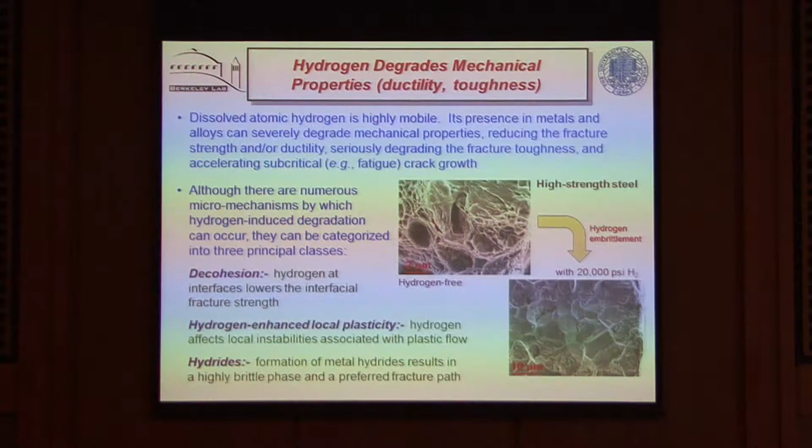And of course, in certain materials, hydrogen can form hydrides, and these are a particularly brittle phase, which can then fracture. This is a problem in things like zirconium, titanium, and so forth. And this is also a mechanism by which hydrogen can accelerate cracking. So the presence of hydrogen can lead to lower fracture stresses, lower fracture toughnesses, but vastly increased subcritical cracking, leading to shortened lifetimes.

And so taking a leaf from the aerospace book, we're going to need to know how hydrogen affects the velocity of cracks. We're going to need to have that information so we can then make safe and reliable predictions about how long components will last in the presence of hydrogen. And this is an absolutely critical aspect of the hydrogen economy, that we can do this. And the parallel, of course, is in the aerospace industry, where this has been done very effectively. Not necessarily for hydrogen, but for...

So how do we do this? How do we actually generate this kind of information? Well, again, it's a marriage of science and engineering. There's a need to understand mechanisms. There's a need to understand how hydrogen can get to boundaries, how it may lower decohesion, or how it may affect the local instabilities associated with plasticity, and how it may be synergistic with other events that are taking place. In steels, of course, we know there's a segregation of impurity elements to boundaries.

There is clearly a synergism between this type of phenomenon and the phenomenon associated with hydrogen. There's a need to use mechanics. We can understand these mechanisms and then embed them in crack-tip fields and make predictions, which is a form of fracture mechanics, when failure can take place. So there is both the science and the fracture mechanics, and the integration of those, which are very important for the understanding of this problem.

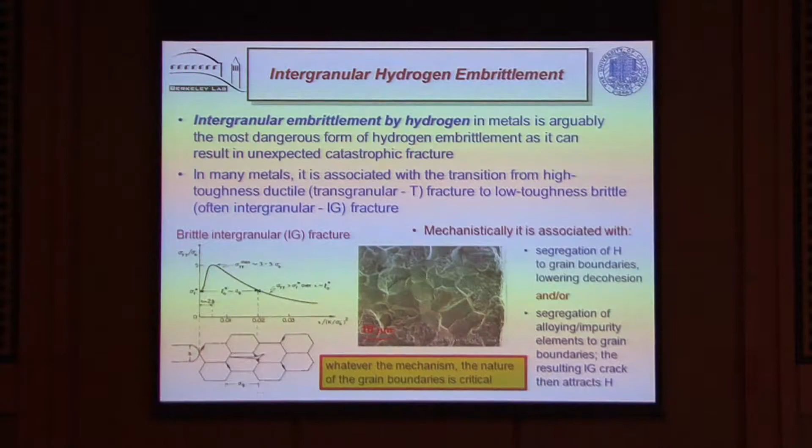This is K. It's a function of the stress times the square root of the crack length, with some geometry factor in there as well. And this defines the intensity of the stresses and displacements ahead of that crack tip, and as such can then be used to correlate to the onset of fracture. We can correlate the value of this stress intensity to when fracture can take place, and we can also correlate this term to the velocity of cracks. So it's a quantitative means of examining from a continuum perspective when and how fracture takes place.

Now, in its simplest form, we talk about a critical value of K, which is known as the fracture toughness. That's when the component breaks in two. It's the catastrophic failure point. But that's simply the end point. If one wants to know how long a component may last, a hydrogen tank, a pressure vessel, piping, one needs to know how long it takes any pre-existing crack, which inevitably will be there, to grow until you exceed this fracture toughness. And that's what subcritical crack growth is, and that's the essence of the prediction of life in most engineering components. And so when K values are less than the critical K, cracking can occur subcritically.

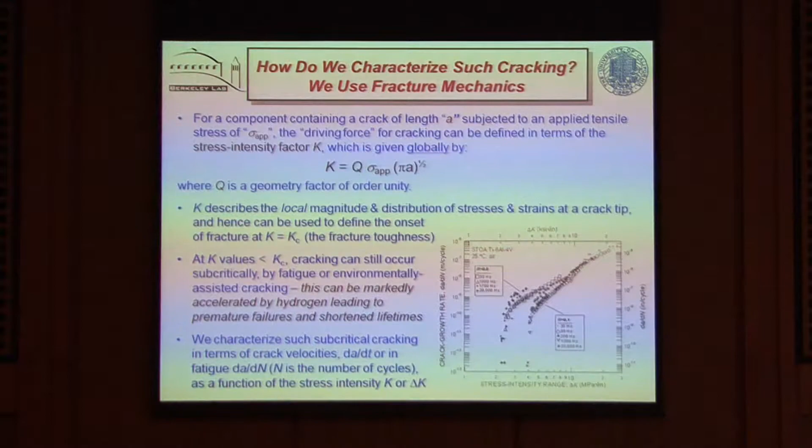Now, one of the unique aspects of Kyushu University now is these sorts of plots are being generated for the latest generation of materials that will contain hydrogen, and, in one very important aspect, at very high pressure hydrogen. If we're going to use a hydrogen economy, we're going to have compressed hydrogen. There is very little data on the velocity of cracks in steels or other materials in high pressure hydrogen environments. My colleague Brian Somerday will talk about this this afternoon, because he has one of the few facilities in the United States to do high pressure hydrogen. There are such facilities here in Kyushu University. So this is a very, very important aspect of the work that will be done here.

So my take-home message today is that there is a need to understand how hydrogen affects the properties of materials, and one critical aspect of this is how it affects subcritical cracking. We need to generate data in terms of the velocity of the crack as a function of the stress intensity. We need to look at this under sustained loading and under fatigue crack growth loading, and we need to be able to cope with how you integrate these things together.

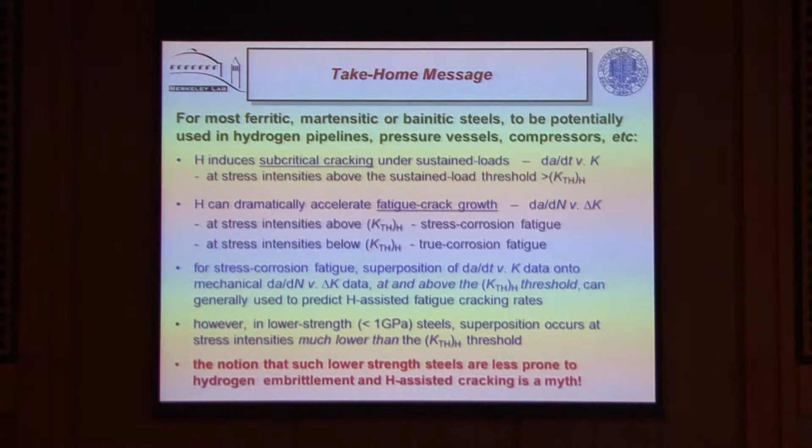And one other thing I might mention here is that some of the ways that this has been done tend to suggest that high-strength steels can be very, very susceptible, and low-strength steels can be far less susceptible to the embrittlement of hydrogen. And I think that is a myth. I think if you look back, you'll see many, many examples where people have used lower-strength steels, and I'm talking about steels less than a gigapascal in strength, thinking that they are relatively immune to hydrogen embrittlement. And in fact, that is not the case. And it's come about because of a lack of understanding of how the experiments are done.

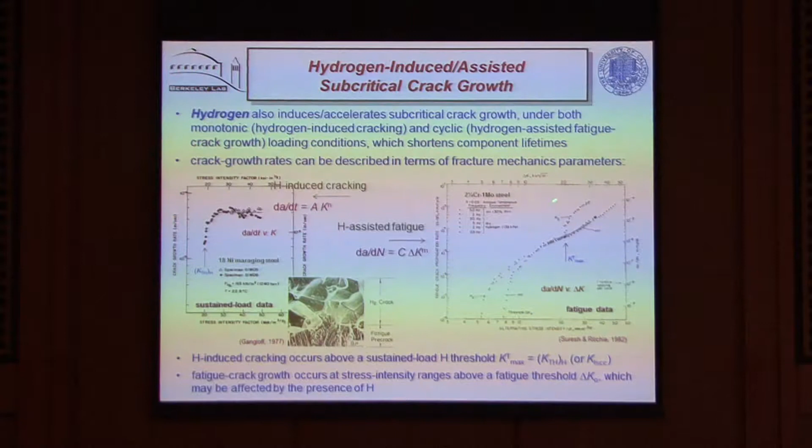And in a high-strength steel, this threshold is the one we measure under sustained loading. And so this has led people to think that there may be a superposition of these types of behavior. This is the sustained loading, this is cyclic loading, and we can simply superpose this data on top of fatigue under a non-hydrogen environment and predict what's happening in fatigue in hydrogen.

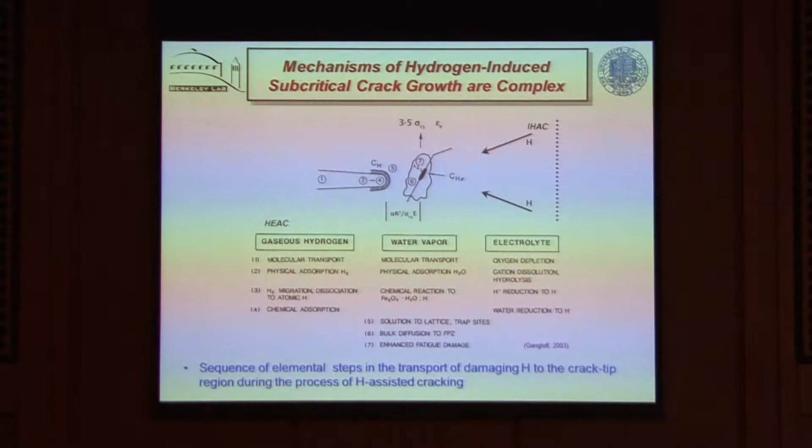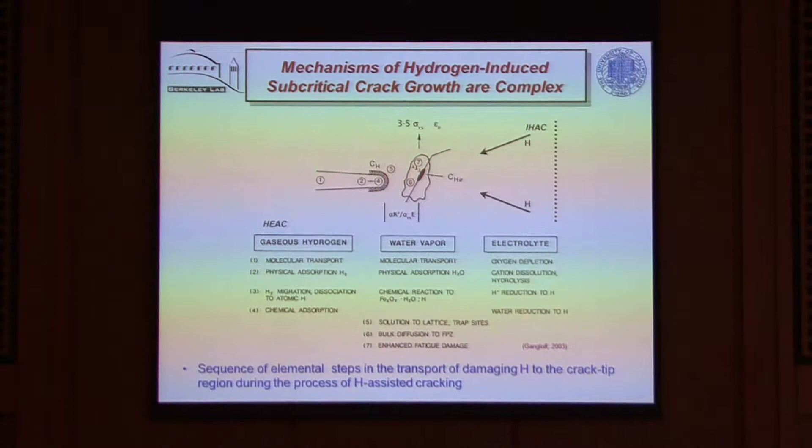Now, mechanistically, there are a whole plethora of mechanisms that are important. There are transport mechanisms of how hydrogen gets to the crack tip. There is oxide at the crack that has to be penetrated. There is the mechanics of how the hydrogen affects the fracture inside the material, be it some decohesion at an interface or a dislocation pile-up against an interface. And it needn't be gaseous hydrogen; we can generate hydrogen in an electrolyte just from the reduction of water, for example. All these mechanisms are extremely complicated, and these mechanisms still need considerable work to be done on the scientific basis.

But in terms of the engineering side, these are embedded into crack tips, and we can see certain patterns. As I said, we talk about what we call true corrosion fatigue, where the effect of hydrogen here is occurring primarily at lower stress intensities. And people talk about stress corrosion fatigue, where we get this sudden superposition, this sudden elevation of the crack growth rates in hydrogen. And of course, in most cases, we have both these phenomena.

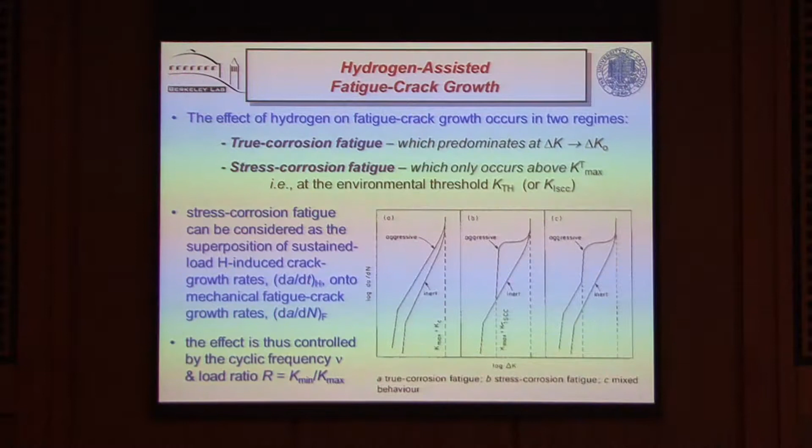Now, how can we take care of this effect here? This is a rather interesting phenomenon which has been known for some time, is that we can generate superposition. This is the rate of growth of a fatigue crack, dA/dN, this is the crack growth rate versus the stress intensity. There we have the effect in air, and then we put it in hydrogen, and we get this sudden acceleration. And this can be basically achieved by superposing this data onto the fatigue data.

But there's things we have to think about here. This is K, and this is delta K. So where this superposition takes place on this axis depends on the relationship between the cyclic and monotonic loads, the so-called R ratio, as it's sometimes called. And in this axis, we have dA/dt, and this is dA/dN. So the superposition in this direction depends on the frequency of loading. And so depending on the relative frequencies and the load ratios here, this superposition can take place at different points in the horizontal and vertical axis, but in a very predictable fashion.

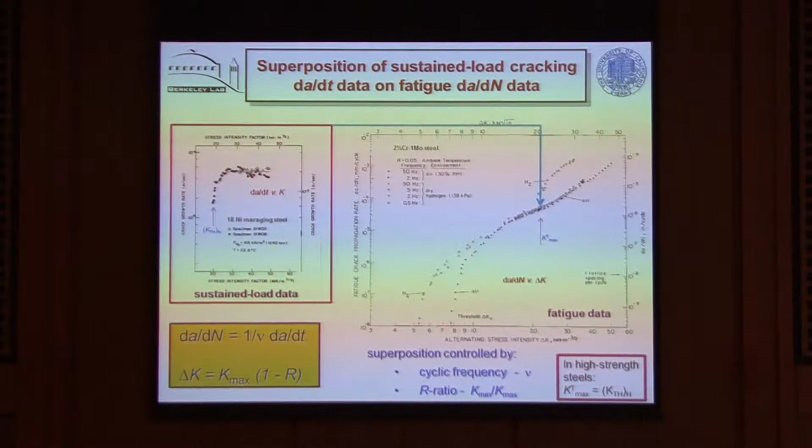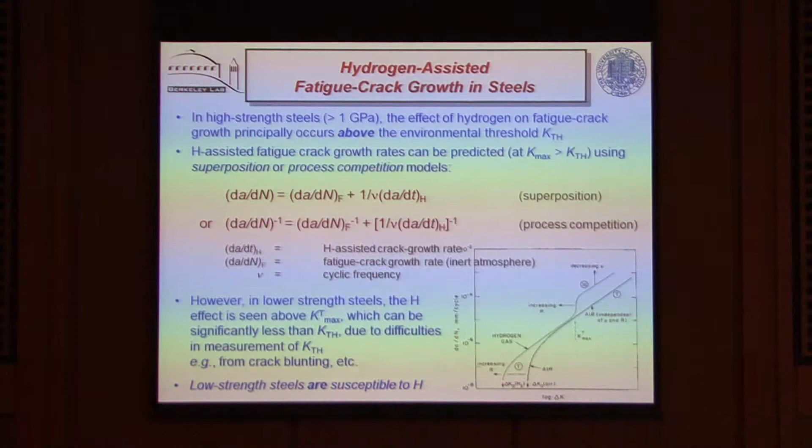So you can do this superposition in two ways. You can superpose the monotonic and the cyclic loading in series, or you can superpose it in parallel, depending on whether your two processes are simultaneous or are competitive. And I won't go into the details of this, but in high-strength steels, this is a very predictable process. This point at which you get this superposition, you can measure under sustained loading as the sustained load threshold. Very nicely cut and dry, and you can generate a good understanding.

And this is what the data looks like. This is data on a martensitic bainitic steel. It's a pressure vessel steel. I haven't talked about this lower effect. I'll talk about this a little bit later. There's another effect here, but you can see the superposition here of data in hydrogen. This is in air. If we have hydrogen sulfide, of course, we get higher fugacities of hydrogen, and this leads to faster crack growth rates.

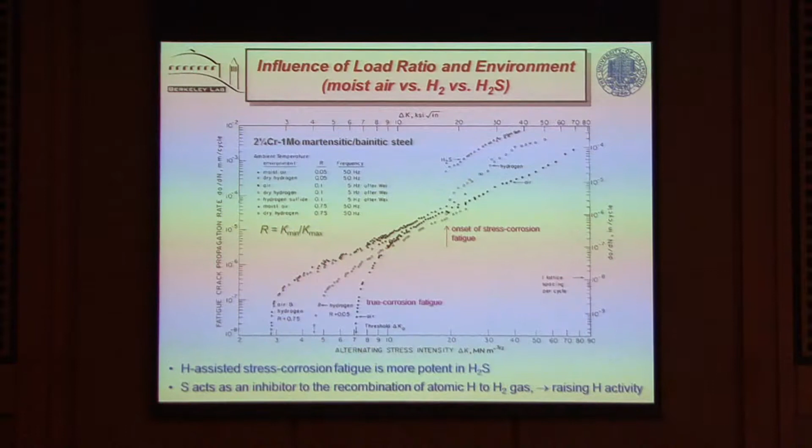This is in pressure. Now, this data was taken some time ago, and here we're dealing with the same superposition. This is basically air. Superposition in low-pressure hydrogen, which would be typically about a tenth of a megapascal. And at the time I looked at this, we had data at 7 megapascals. We got a much higher rate of crack growth in high-pressure hydrogen. 7 megapascals. The facilities here at Kyushu can do tests at 120 megapascals.

Now, there's lots of data in the literature on hydrogen embrittlement and how hydrogen affects crack growth, but there's very, very little data at these very, very high pressures. So from an engineering perspective, information on how cracks grow in high-pressure hydrogen, which reflects the reality of a hydrogen economy, is critical, and that's taking place here. I think probably this is the only place it can take place. There are very few facilities outside of Japan.

Now, there is another effect that's interesting, by the way. If you look at lower delta Ks, you see hydrogen also accelerates crack growth down here. And what's interesting, in these sorts of steels, where the mechanism is primarily decohesion related, the hydrogen-assisted cracking here is intergranular, but down at these lower delta Ks, it's not. It's transgranular still. And in fact, these lower growth rates are very important because they can dominate a life prediction calculation.

Now, the complexity here gets very large, and one of the effects that we deal with down here is not so much that hydrogen accelerates crack growth, but air can decelerate crack growth. In a moist environment, you form oxides at the crack tip. And at these very low growth rates, the so-called crack opening displacement can be fairly small. And these oxides then can wedge the crack. The analogy is if you're talking and I put a donut in your mouth, you're less able to open and close your crack. Doesn't seem very scientific, admittedly, but it's a very potent mechanism which basically reduces the growth of cracks at these low levels.

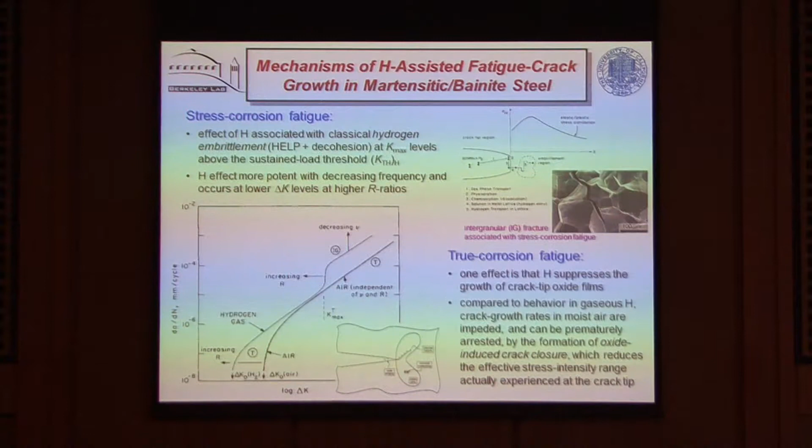Now, there is one final point I want to mention here, is that this approach of superposition has been around some time and works extremely well with high-strength steels. But if we go to a low-strength steel, and low-strength steels are still used in a tremendous amount in engineering because they have higher toughnesses and are less prone to fracture. Below about a gigapascal, if we try this approach, it doesn't work.

In this particular material, this is a lower strength 2¼ chrome moly steel, the stress corrosion, or the sustained loading threshold in hydrogen is at 85 megapascal root meters. It's about here. So many people have thought, okay, these steels are relatively immune to hydrogen embrittlement. If I have stress intensities below this level up here, I haven't got to worry.

But if you do those experiments in fatigue, and most structures see cyclic loading, lo and behold, you get this same effect, this sudden acceleration, but at much lower levels than the stress corrosion, than the sustained load cracking. If you did the test under non-cyclic conditions, you'd have to have a K up here before you see hydrogen embrittlement, but under cyclic loading, it occurs at much lower levels.

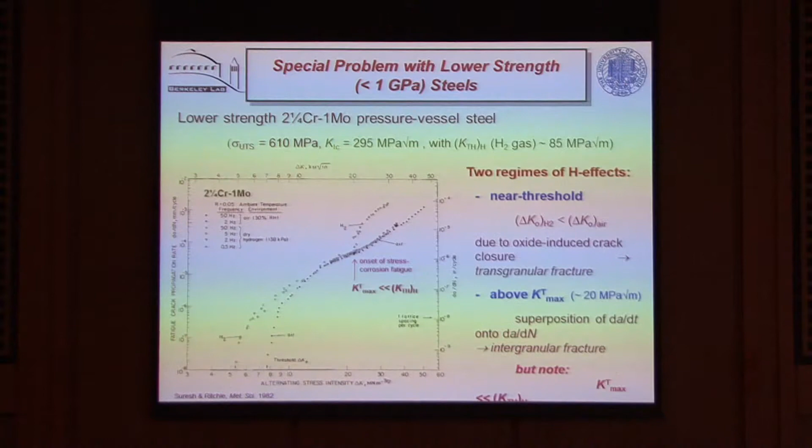And the point is that this is the same sort of stress intensities you see in high-strength steels. So low-strength steels are as susceptible to hydrogen embrittlement under cyclic loading. But you wouldn't realize that if you were looking at non-cyclic conditions. Now, why is that? And the reason is that in these lower-strength steels, the crack tends to blunt.

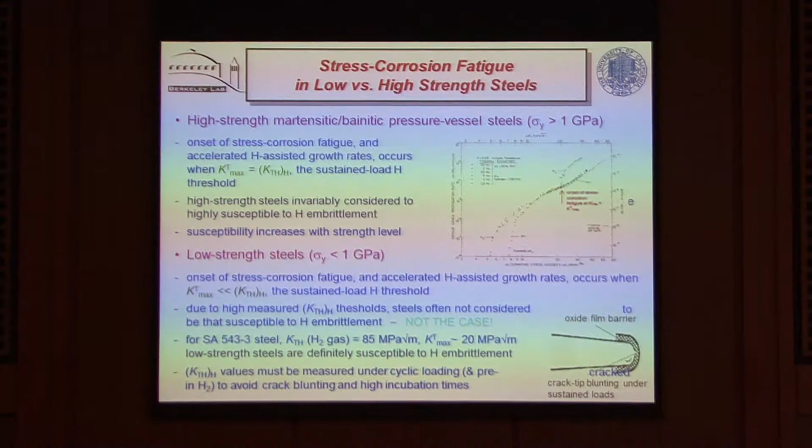And in blunting, it forms an oxide film, and it gets more difficult for hydrogen to penetrate that. But of course, that's a rather artificial situation, because in reality, there's always cyclic loading. And the cyclic loading then keeps those cracks sharp and enables the same phenomenon to take place as you would see in a high-strength steel.

So let me conclude by saying here, I've tried to look today at one aspect of hydrogen which is of real great importance to society, and that's the fact that hydrogen degrades the properties of materials, making them more prone to fracture and making their lives much shorter than one might predict. And this is where the engineering side of this particular center becomes important, and one area where there's a desperate need for new data at high pressures, which are typical of what we're looking at in the future. And that's where Kyushu is going to be absolutely critical.

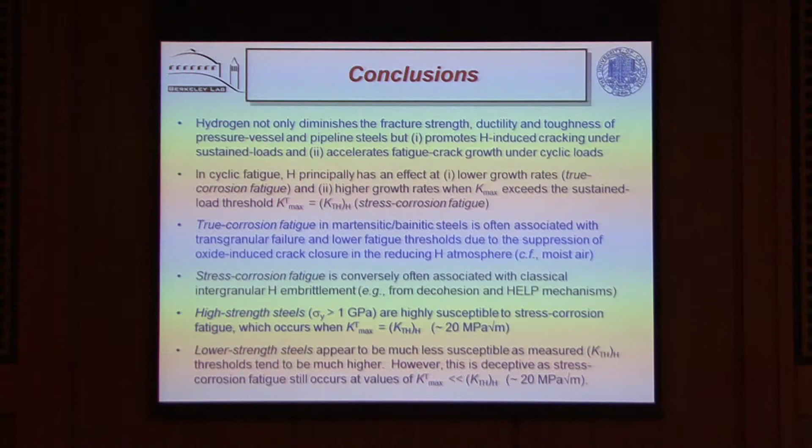I've talked about how there are different effects at lower growth rates versus higher growth rates, and the need to look not simply at the final fracture, but at the question of subcritical cracking. I've looked at how higher strength steels can show this effect very, very obviously, but it's also present in low strength steels. And in general, how there's a need here to fuse the scientific understanding of how hydrogen affects materials with the engineering need for actual data which can be used to predict the life and ensure the safety of our components that contain hydrogen.